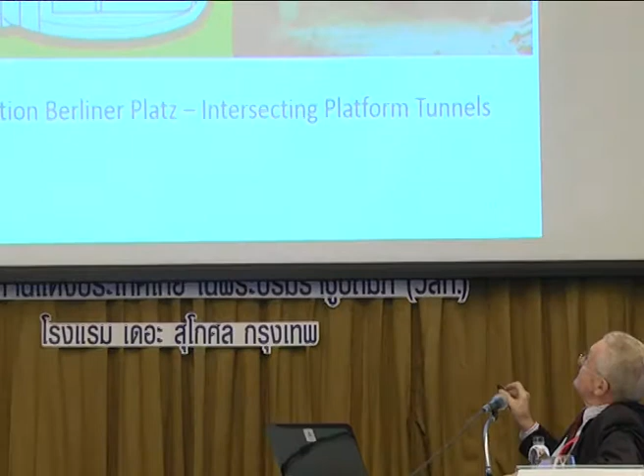You can see that this is the first excavation tube, station platform tube, and this is the second station platform tube. Here you can see these in construction.

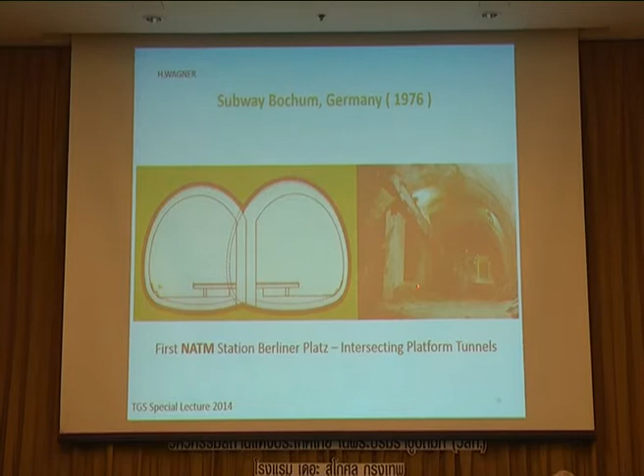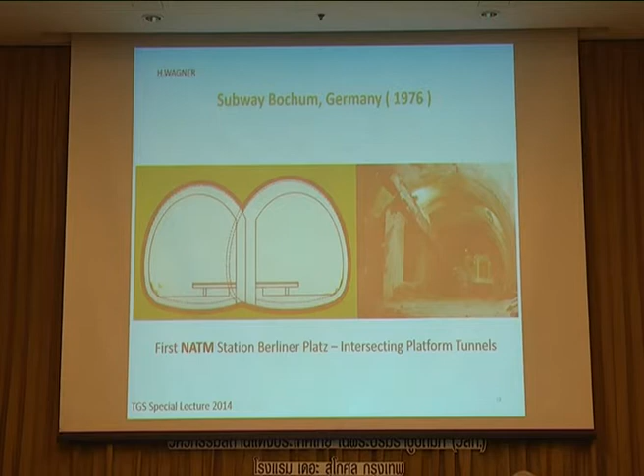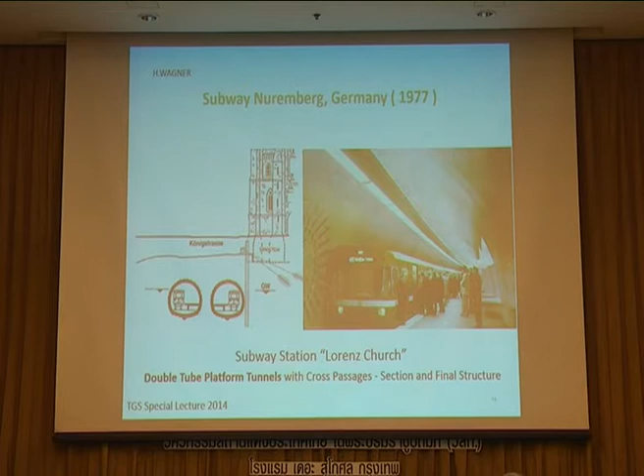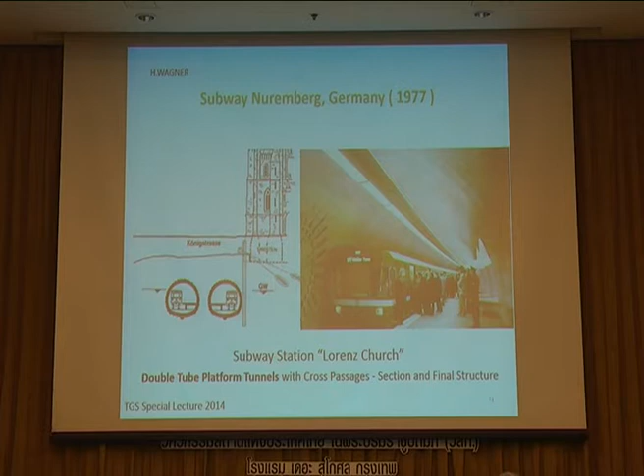The next one was another metro station for the subway of Nuremberg with separated platform tunnels, but the separated platform tunnels have been connected with access tunnels from one platform to the other. It was about the same size, 120 square meters for both platform tunnels together, but instead of the structural concrete pillar in between, there was an earth pillar.

You can see here the earth pillar, which of course needs some geotechnical consideration because of the forces coming down here and having to be guided around. So this earth pillar in between is getting higher stress and has more stress accumulated than before.

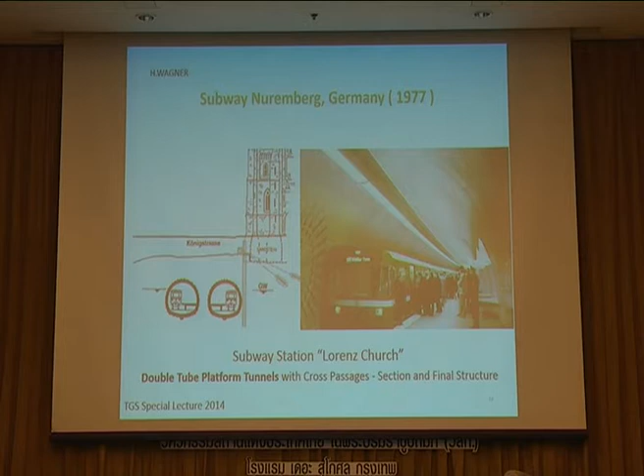Now this is a so-called multiple drift station in Munich, which was first time 185 square meters, a big step forward from 120 to 180 square meters. And this was, I call it, an export product hit, because this type of station has been used in many other countries, following first the Munich so-called Theresienwiese station.

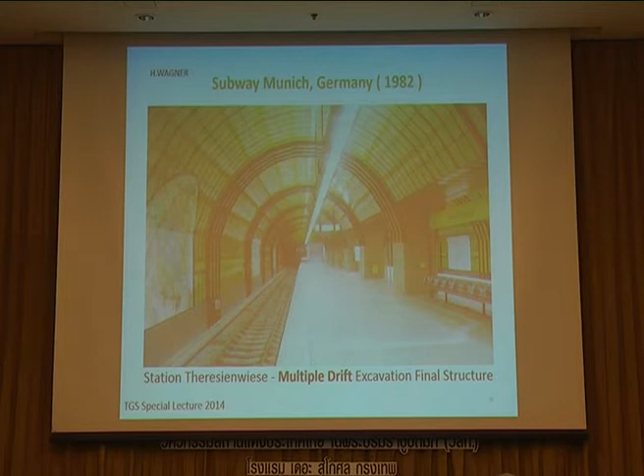Those of you who like to drink beer know that in October, under this surface, there is a station, but on top there is a lot of beer drinking. It's the famous Oktoberfest in Munich.

So in North America, the Fort Totten metro station for the Washington Metro did follow almost exactly the same structural principles as experienced for the Munich Metro, with one additional aspect, the environmental aspect, because this Fort Totten station has been constructed underneath a park.

There was competition between cut and cover and doing the station with a conventional mining method. The conventional mining method has been cheaper, just comparing the construction cost for the civil works, but it saved 10,000 trees on top of that station.

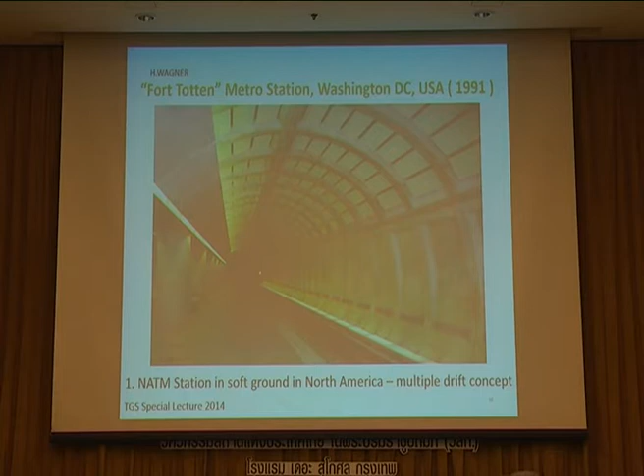So for the people from Washington, capital of the United States, it has been very important to save the park and the trees where they do their jogging and so on. So it has an environmental aspect which has not been reflected in the cost, though the mining method cost has been cheaper than cut and cover. So it was a big success.

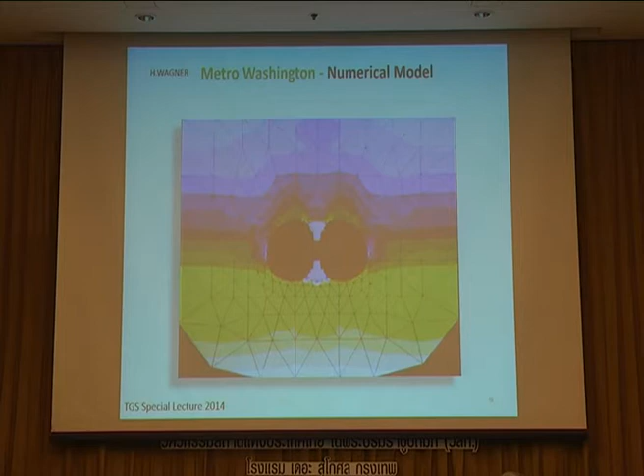Washington Metro, of course, all this needs state-of-the-art numerical modeling, today finite elements. This shows in more detail the start of the central gallery with a top drift, then full excavation of the central gallery, installation of bottom beam, pillars, and roof beam. Finally, the sidewall galleries, demolishing them to get the full cross section, plus installation of the platform.

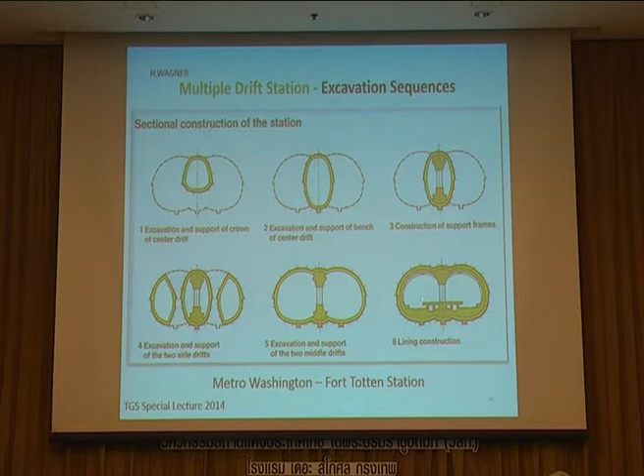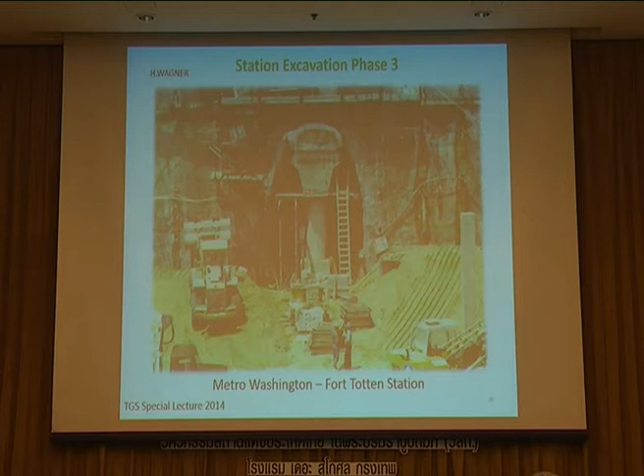Some slides from the construction. This is the portal wall, and you can see the central gallery. You can see the sidewall gallery here, and the sidewall gallery on this side. The central gallery already started to have the beams.

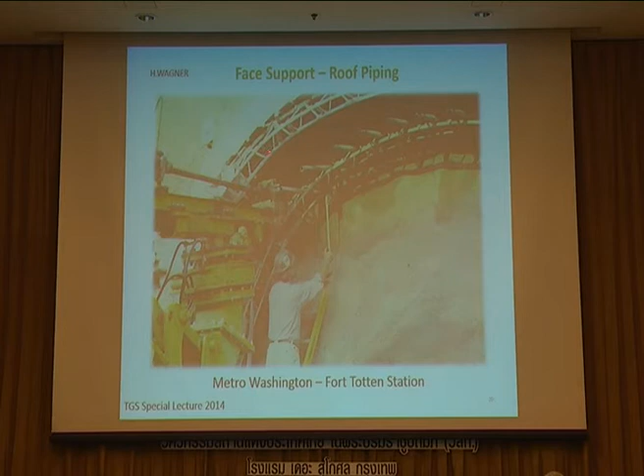Another side drift excavation, a more detailed picture from the side drift excavation. And the next shows that this all has been in real soft ground, so some pre-running support, umbrella-like support, had to be installed. Also you can see conventional tunneling using, mostly in Europe nowadays, lattice girders, not full profile steel arches. Lattice girders give a better compound for the shotcrete.

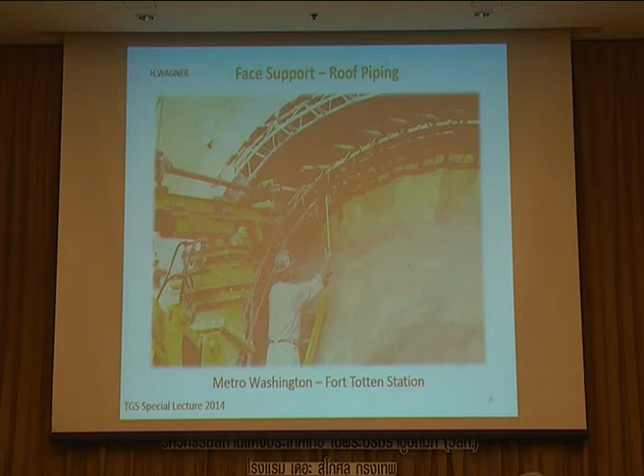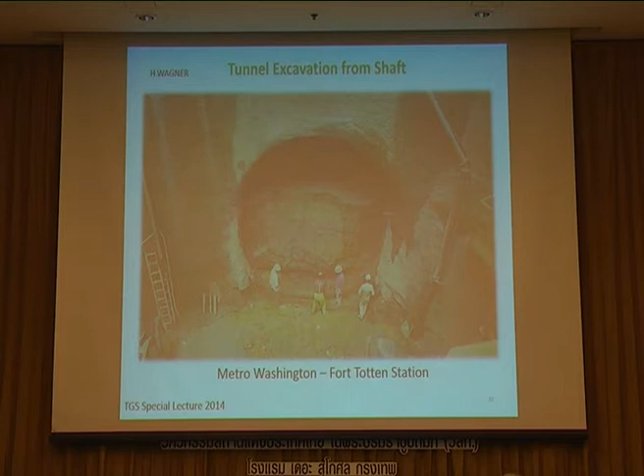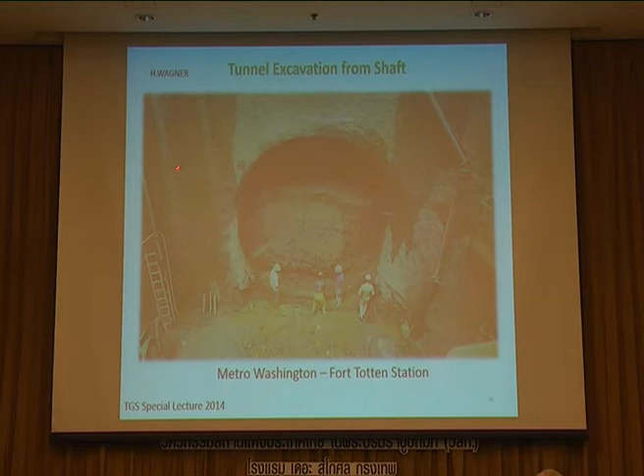The shaft construction also used, for the first time, shotcrete technology or the New Austrian Tunneling Method. The shaft, 25 meters in diameter, was excavated from top to bottom using shotcrete. Here you can see the shaft, and then from the shaft there is a breakout for the so-called ventilation tunnel beyond the station.

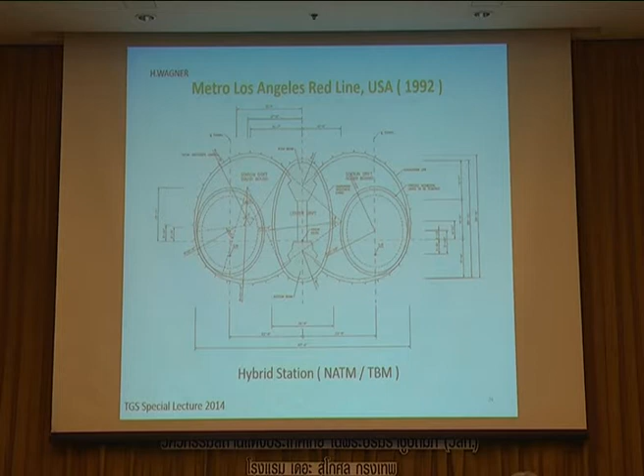For the Chawri Bazar station for the metro in New Delhi, India, a special design has been developed with access to the station from cut and cover shaft areas, and then platform tunnels, mined sections for the platform tunnel with connection galleries in between the platform tunnels.

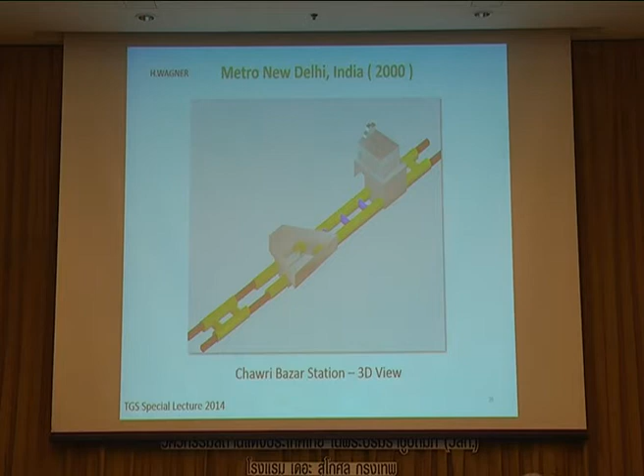New Delhi has successfully completed this. This is a cross section. You can see that there is, from center to center, 21 meters between the two platform tunnels, and the connection tunnel in between these tunnels.

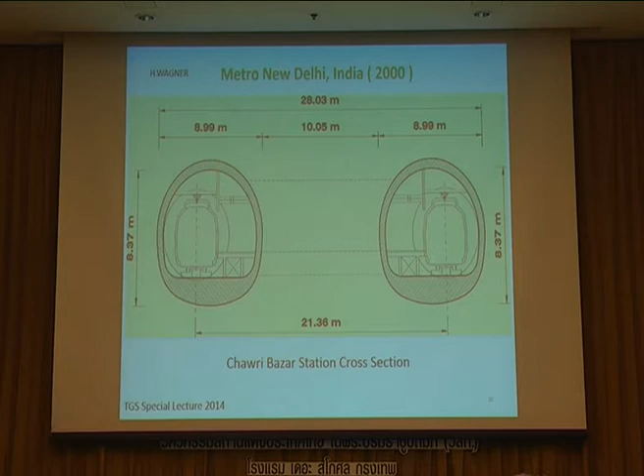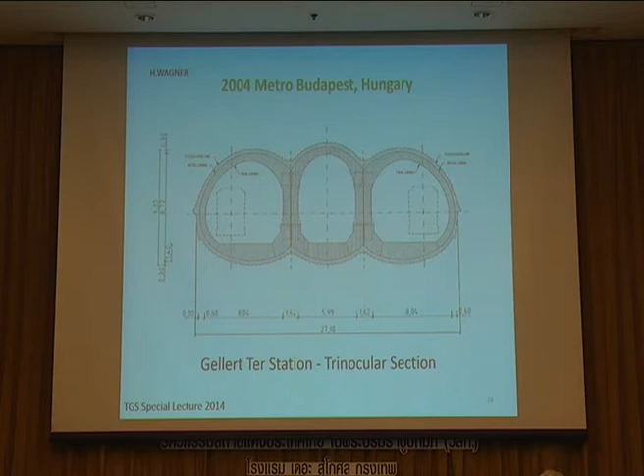This is another Metro Budapest station, the so-called Gellert station, near the river Danube in Budapest. Instead of consisting of two station tunnels, there is a three multiple drift station here, with the platform tunnels on the outside and the passenger distribution tunnel in between.

All of this is possible only with the conventional mining method. That's the binocular type Gellert station, again in cross section, with cross passages between the platform tunnels, and here we have a longitudinal section.

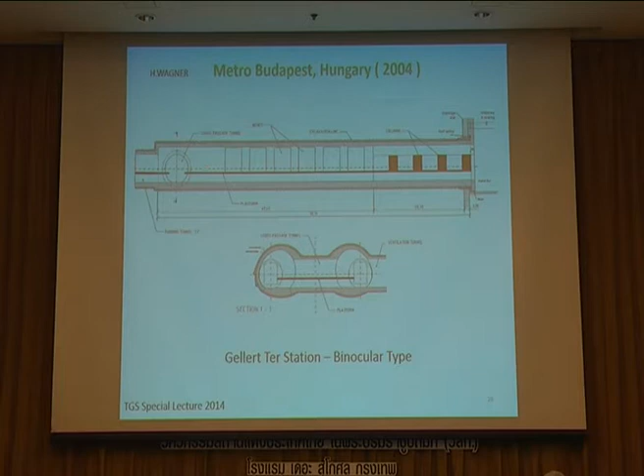So what are the station design issues? Beyond economy, the designer should consider the following major aspects. First of all, the size and shape and the number of drifts, and the shifting of stresses in the underground. It is always an advantage if it is a symmetrical structure.

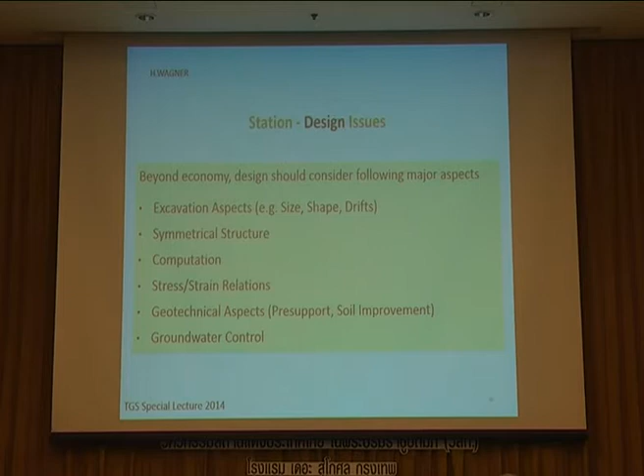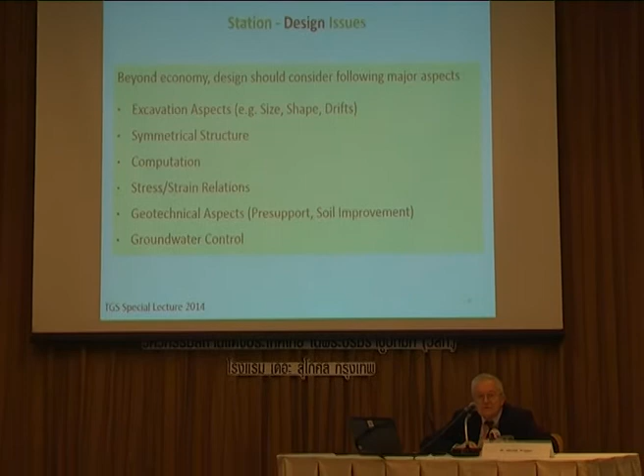Computation—everything has to be computed before we go into construction, in particular where we have to look into stress-strain relations. Then we have to look into the necessities of the geotechnical aspects, the necessity regarding pre-support, mechanical pre-support. We have a number of tools for this pre-support nowadays, in particular also the question of soil improvement, which for Bangkok certainly is a very important issue.

There are construction issues for multiple drift stations. Design and construction method shall satisfy all project conditions defined by the geology, geometry, and by the environment. These are given conditions.

Construction activity on the surface will be limited to a minimum, and a multiple drift station is limited to construction access shafts to be covered. So we cannot have a multiple drift station without the access, and the access has to be a cut and cover structure.

So there are structural issues like shotcrete lining. It has to take full loading in construction. This is a conservative assumption nowadays. Shotcrete quality has been significantly improved, and more projects are getting shotcrete as a final structural lining.

The final lining is then designed to take full loading, where shotcrete properties are converted into soil properties. Again, to convert it into soil properties is a conservative approach, and it has to be based on the superposition of load cases. We have to make the individual load case investigation, but then finally we have to make the superposition.

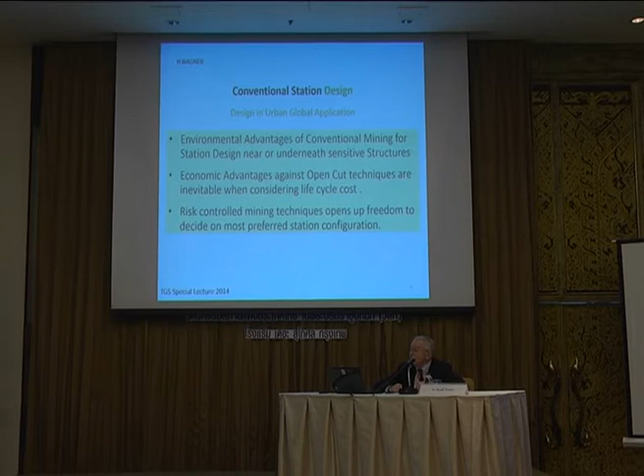In conventional station design, environmental advantages are evident near, in particular near or underneath sensitive structures. Economic advantages against open cut techniques are inevitable when considering life cycle cost.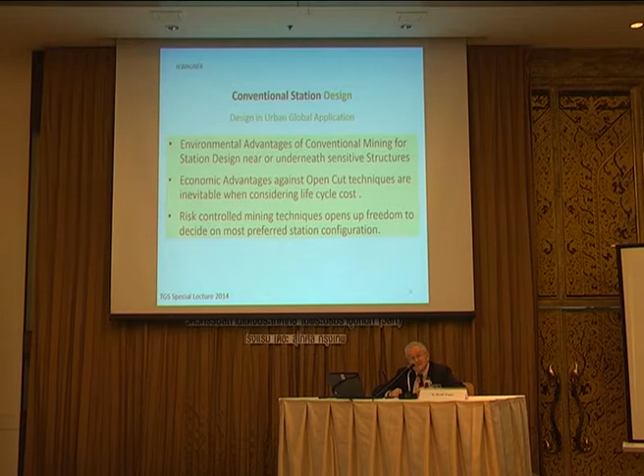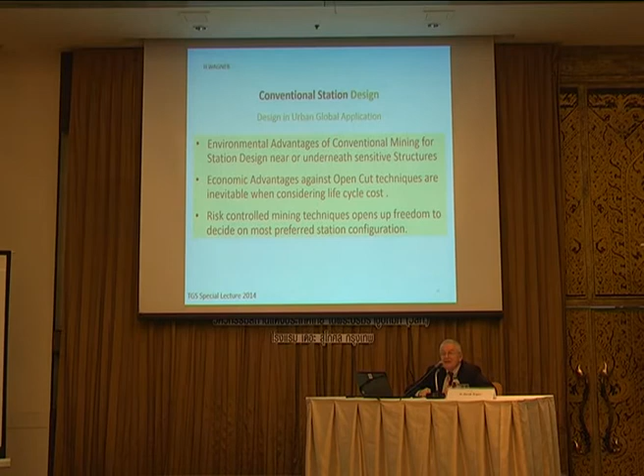We have another couple of cities right now which start to implement metros in different parts of the world, for instance in Chile, in Santiago, and in Lima, in Peru. So these life cycle costs nowadays are a standard criteria for the decision on what construction should be done.

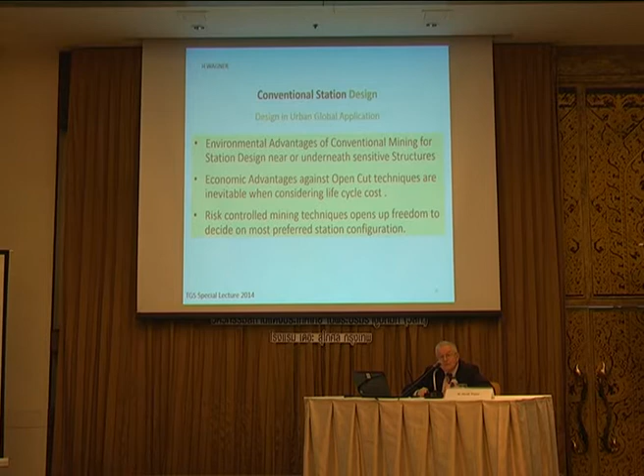And risk has to be controlled. There is always a risk in underground structures. However, there are no new risks. These risks, which are all known and can be mitigated, can be assessed and can be controlled through risk mitigation.

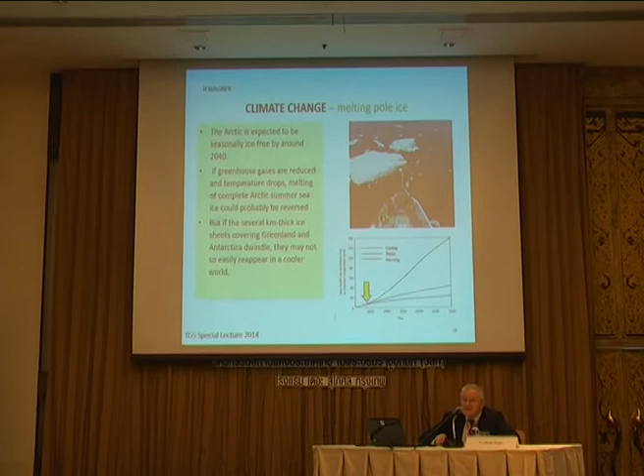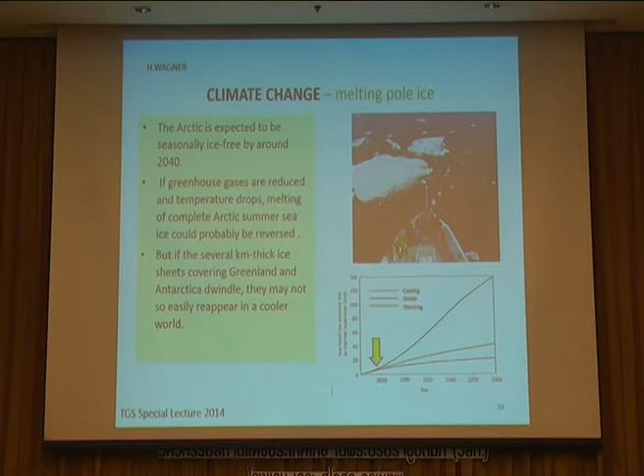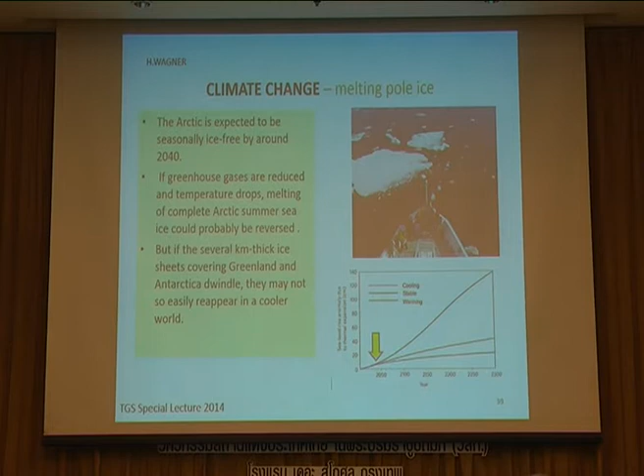Climate change, if we look to the melting ice on the poles, we know that we are 5 minutes before midnight with our measures. We have to take measures in order to mitigate the risk which comes from climate change, melting ice, increase of the seawater level. Here you can see different forecasts: 2000, 2050, 2100, 2300, and in any case, whether we look into cooling or stable or warming conditions, we can see that the temperature curve increases.

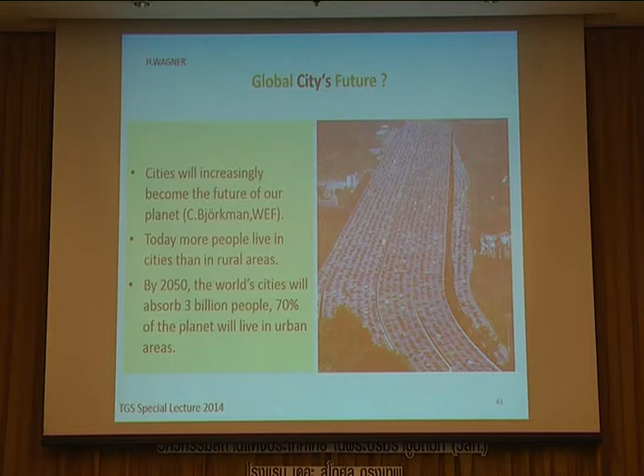So climate change is for sure, it's going to happen. The future of our cities, they will increasingly become dominating our planet. Today already more people live in cities than in rural areas, and by 2050 world cities will absorb an additional 3 billion people. So 2/3, up to 70%, of the population of our planet will live in urban areas. Global population nowadays is 7.3 billion, increasing by 80 million per year. We will have 10 plus billion people in 2050, so we have to look into social and political aspects at present and in the future, which all indicate there is more need for underground space.

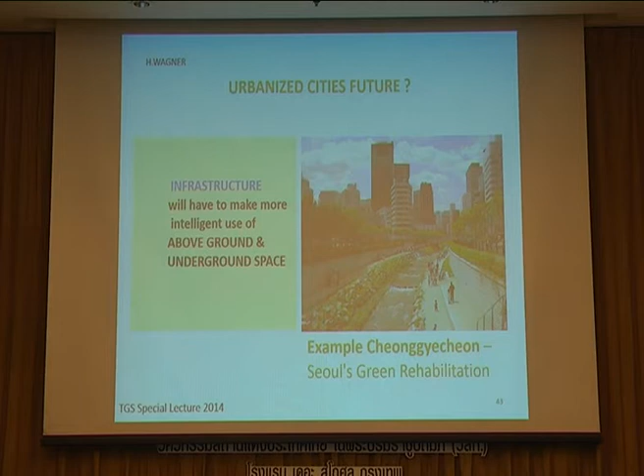An example from Korea, where originally the city and the river Cheonggyecheon has been covered with concrete bridges. Now this river is again given back to the people in Seoul as an example.

Another example is the so-called Boston Central Artery. Here you can see the tunnel. Before all of this, traffic of I-93, Interstate 93 in Boston, was running through the center of the city. Now it's underground and the center of the city is very green and livable.

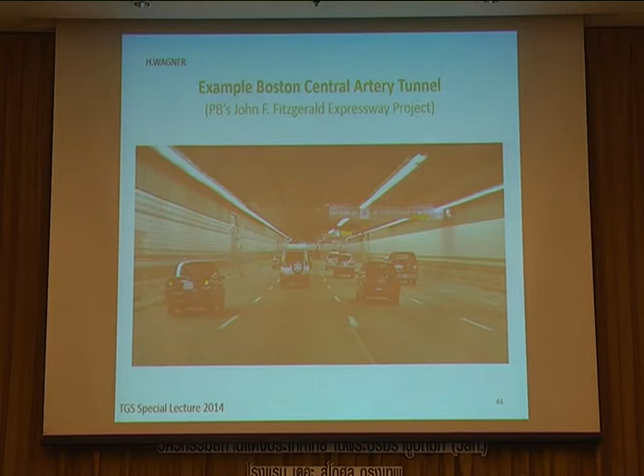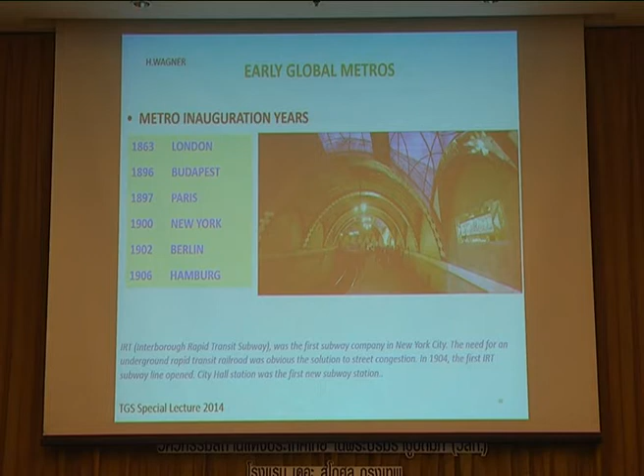Urban infrastructures are for different purposes: water supply disposal, transportation, parking, shopping malls, storage, and water lines. We have early global metros since 1863. London claims to be the first. Istanbul at the same time says no, not London, it has been Istanbul in Turkey, then followed by Budapest, Paris, New York, Berlin, Hamburg. Nowadays we have more than 100 cities.

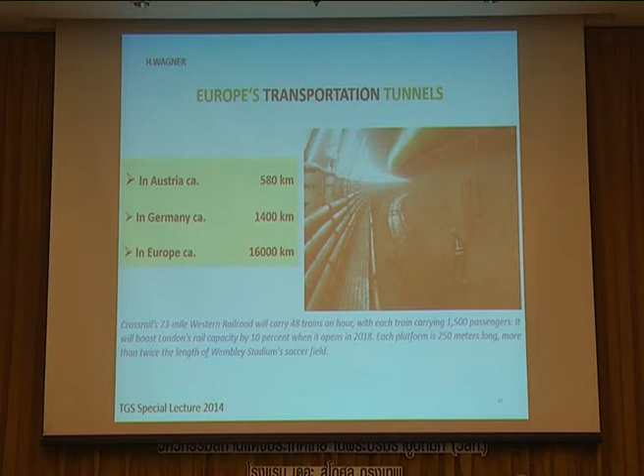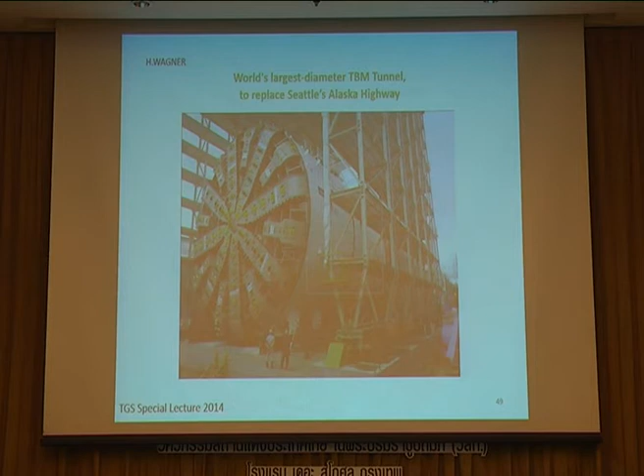In Europe, transportation tunnels: Austria has close to 600 kilometers, Germany 1,400, and in all Europe we have 16,000 kilometers of transportation tunnels only. The largest TBM right now is on the so-called Alaska Highway in Seattle. It's a 17.5 meter diameter tunnel boring machine, at this moment not working. People are facing geotechnical problems.

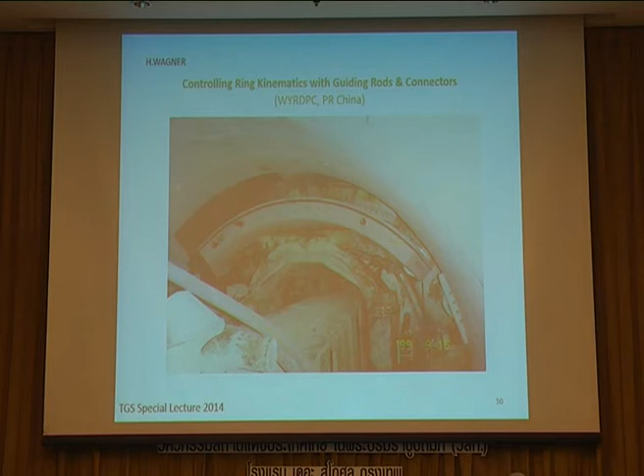This is a smaller tunnel with so-called controlled kinematics in order to put the segments together to form a ring. It is much easier to follow the principle of Lego. If you know your children, they like to play with Lego, they put the stones together. The same principle you can use also for the segments in our tunnels. This is the startup situation of a TBM for that same project.

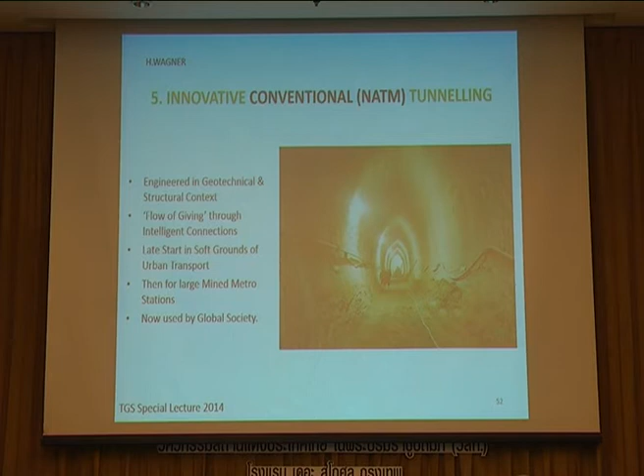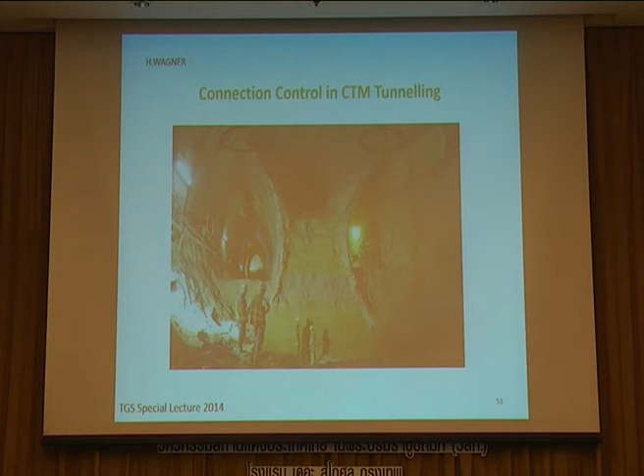Now we have innovations in conventional tunneling. You may look into your slides, I'm thinking I'm running out of time. There are the connection control. If we have multiple drifts, we have to particularly look into the connection of the multiple drift areas with the final structure. We have conventional tunneling phase and in situ lining, of course, shotcrete, lattice girders.

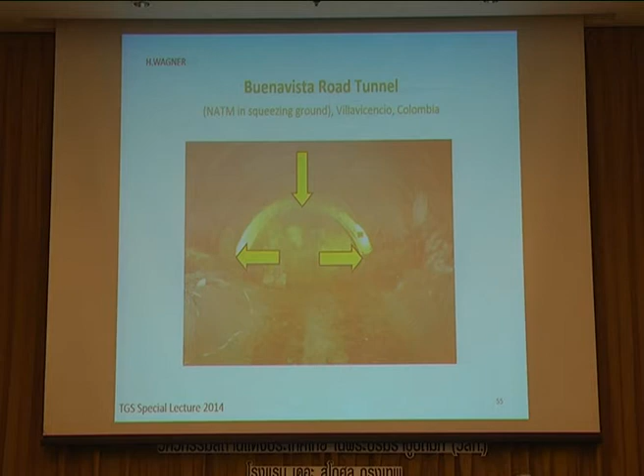We have sometimes very squeezing ground conditions. Very squeezing ground conditions come because we have forces, the loads, geostatic loads, which are deforming, settling the roof, and moving the sidewalls outside.

Flood can be controlled with flood tunnels. Just to let you know the real cost of the damage in November 2011 here in Thailand: 1/3 has been paid by the insurance companies, and it's the amazing amount of $30 billion US. This is only 1/3, so the real damage has been $100 billion US from one flood event in 2011.

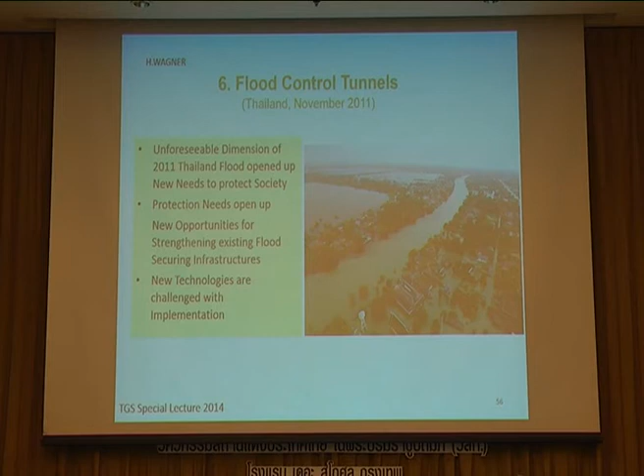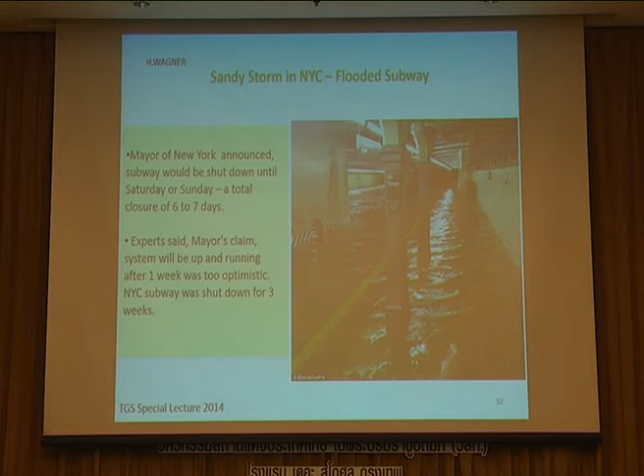And we can control flood with tunnels. This is the flood caused by the Sandy storm, very well known, and it was predicted to be over after 6 or 7 days by the mayor, but then actually it has been more than 3 weeks that the New York subway has been under the influence of floods.

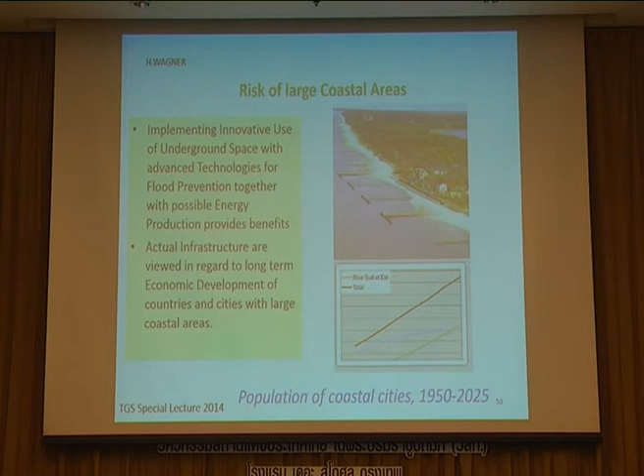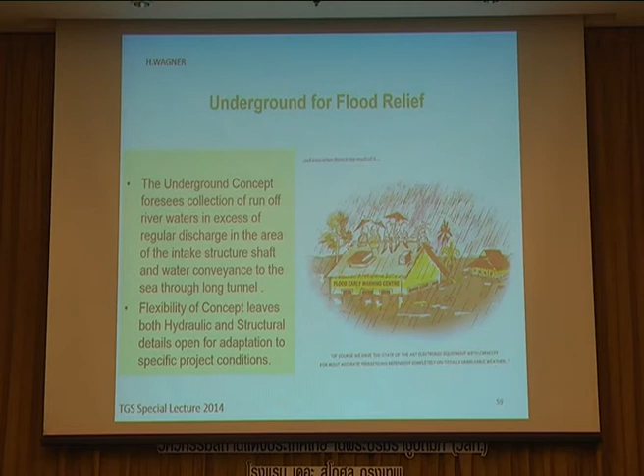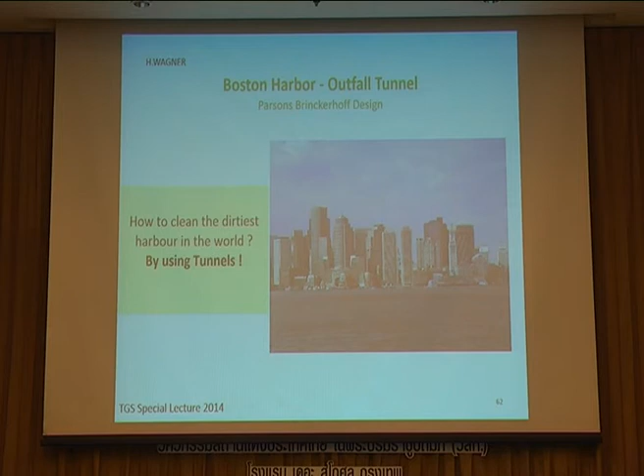So the question was, this is the idea which I developed for Thailand here, for the greater Bangkok area flood relief tunnel. The motto has been: how can we clean the dirtiest harbor in the world, which Boston has been actually, and I have seen both before this tunnel has been implemented and after, and now it's a very, very clean project.

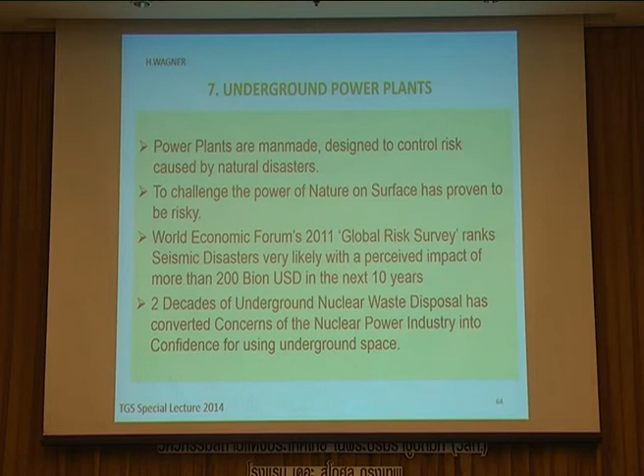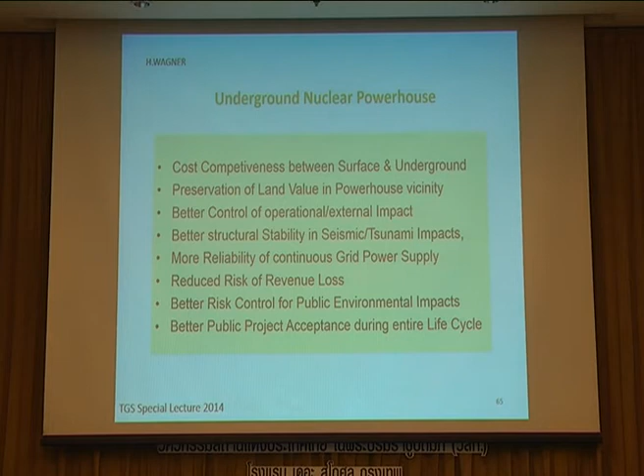That's another idea of the same model - using the underground for power plants. In particular for nuclear power plants, there is a preoccupation among planners who want to follow the lesson of Fukushima, which was a terrible accident because of the tsunami and high waves, well known from weeks and months of daily media coverage. We should put our power plants underground, because the underground will protect them.

So there is Fukushima, there is risk and structure comparison. Of course the risk is much better controlled underground than above ground, because rock overburden gives better protection than concrete, even very heavy concrete.

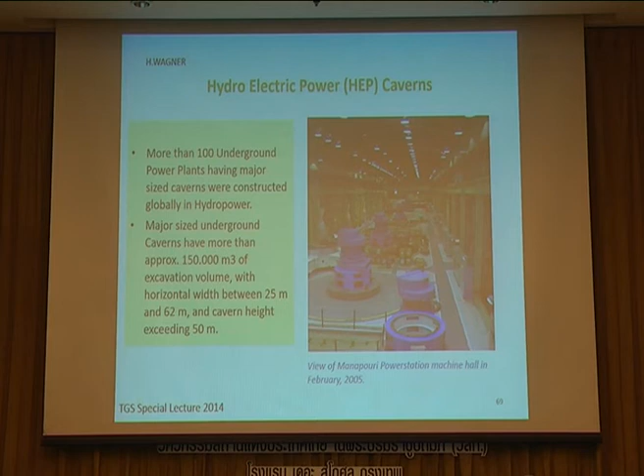Now, in hydroelectric power schemes we go underground. There are many examples of big underground caverns in the world - I think more than 100 underground power plants with generator halls and turbine halls. This is an example from New Zealand, the Manapouri Powerhouse, which is underground.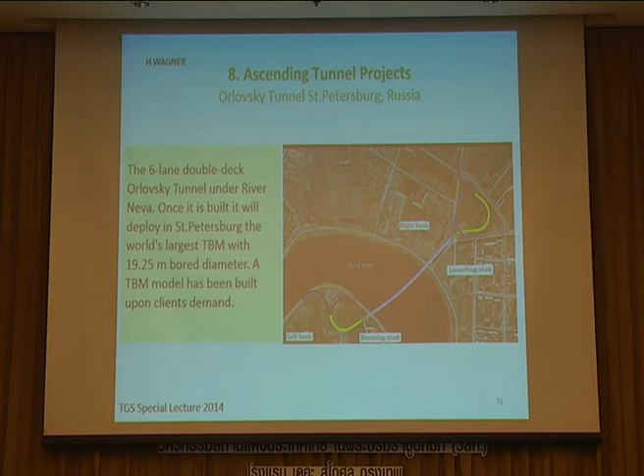There are also tunnel projects using tunnel technology of up to almost 20-meter diameter in St. Petersburg, Russia. The project has not yet started, but the machine has been designed and completely prepared - this is a double-deck tunnel, almost 20 meters in diameter.

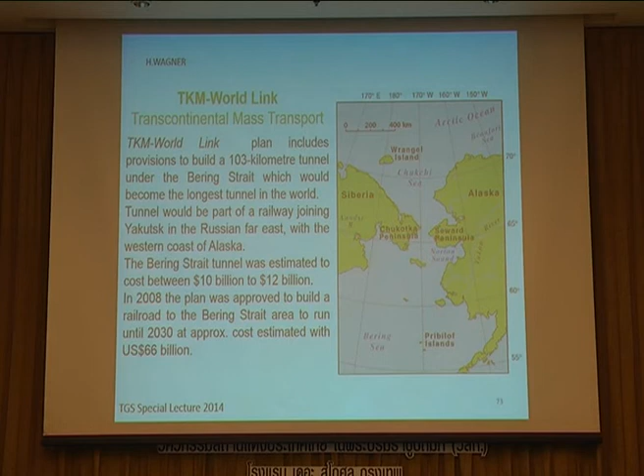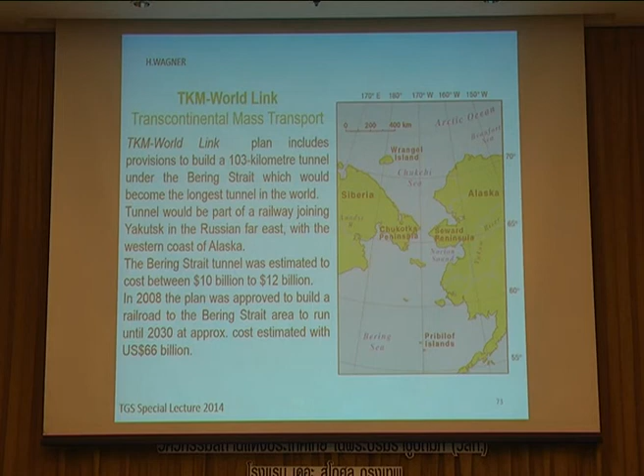Transcontinental mass transport between Siberia and Alaska is a project - an engineering dream, but I think it's getting very close to becoming reality, maybe in 10 or maybe 20 years. Another idea is the tunnel between Java and Sumatra in Indonesia.

It's a 35 or 33 kilometer long tunnel, also in the phase of study, like the Gibraltar tunnel.

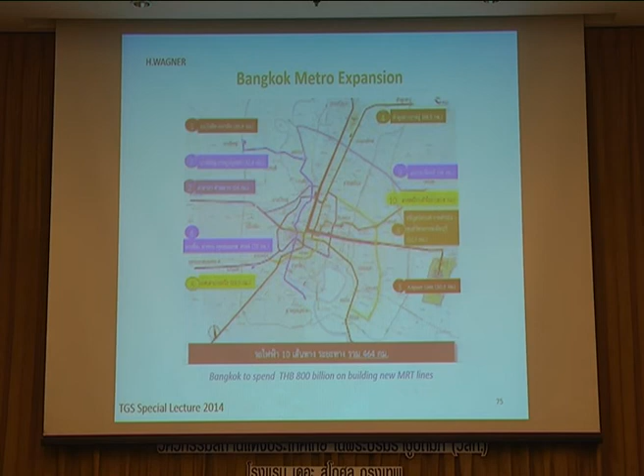Bangkok is going to extend its metro system, spending approximately 800 billion Thai baht over the next 10 years, like the Blue Line extension we heard about, including the Sanam Chai station, in the morning lectures.

Singapore is also going to spend about 20 billion Singapore dollars in the next couple of years, and will have a mass transport system in the range of 450 kilometers.

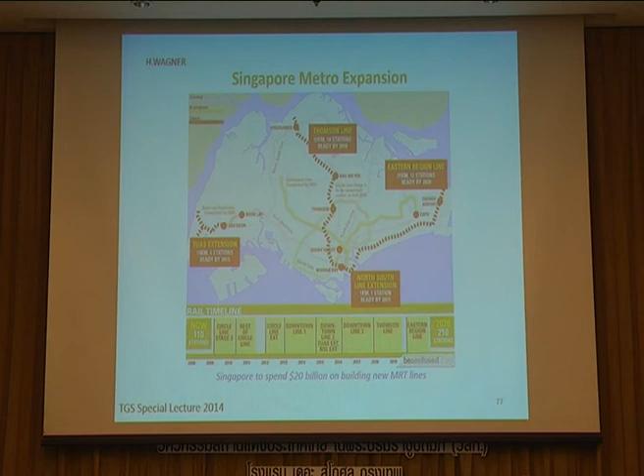Freight could also be transported underground. There is a logistic benefit to it, an economic benefit, and an environmental benefit - and finally, the cost benefit of urban tunneling.

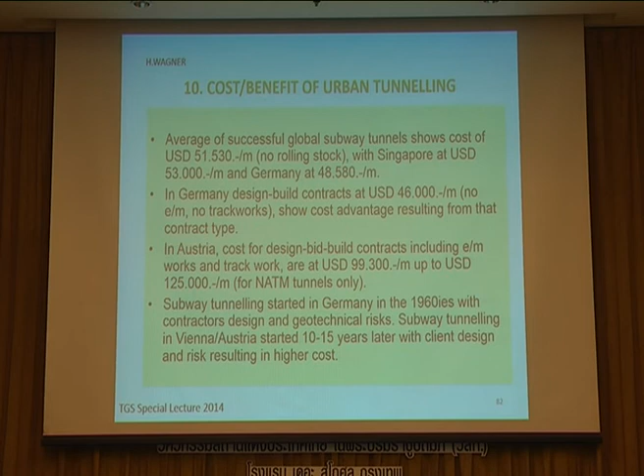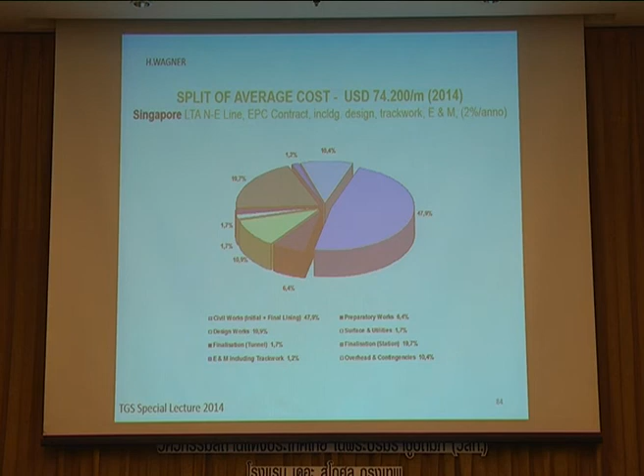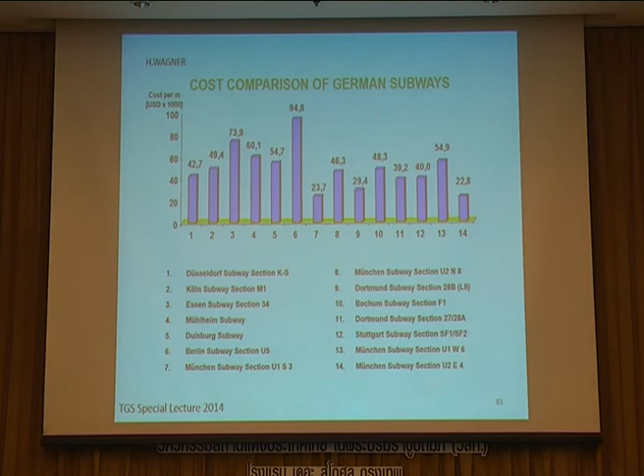I'm just summarizing some pictures. There is a cost comparison between mainly German cities in this slide, with a split of average cost of about 74,000 US dollars in today's value, including design, track work, and electrical mechanical works. In the summary of German subways, you can see it's quite different - between 23,000 US dollars per meter of tunnel at the low end, and the most expensive one at 94,000.

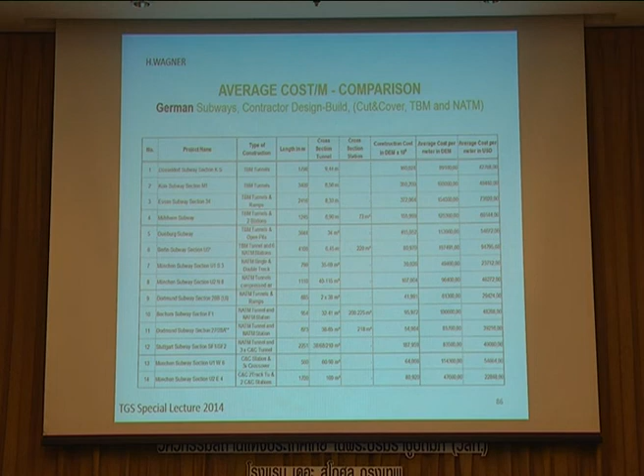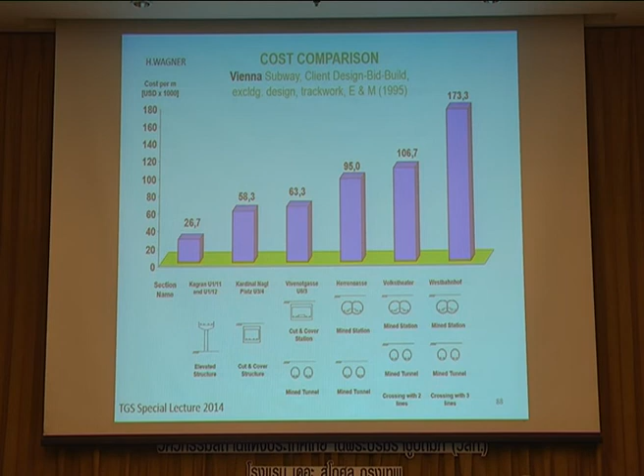Please look into the handout for a more detailed comparison of this cost and the split of the average cost. For the Munich subway, it's amazing - much lower than Singapore, at 45,000 US dollars per meter, including different construction methods. Unfortunately very expensive is the Vienna subway - I told you it started about 15 years after the start of metro construction in Germany, so the experience should have been quite fresh, yet it ended up more expensive, with a split of average cost close to 100,000 US dollars per meter.

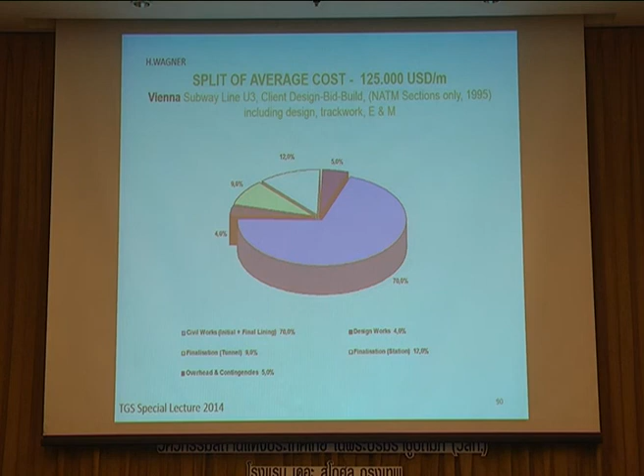But if we look only at conventional tunneling methods in Vienna, we come up with 125,000, not taking into consideration life cycle cost.

So what is the future of urban tunneling? We have to make a partnership between engineering and geotechnology for underground structures. This shows the importance of independent consultants - we should not squeeze the consultants, though I'm a little biased. It should be a fair sharing of risk, which is always there, and there are guidelines for that. The party most capable of managing the risk should be allocated that risk. The contractors should have a commercial benefit, and the owners should be satisfied with the quality and performance of the result.